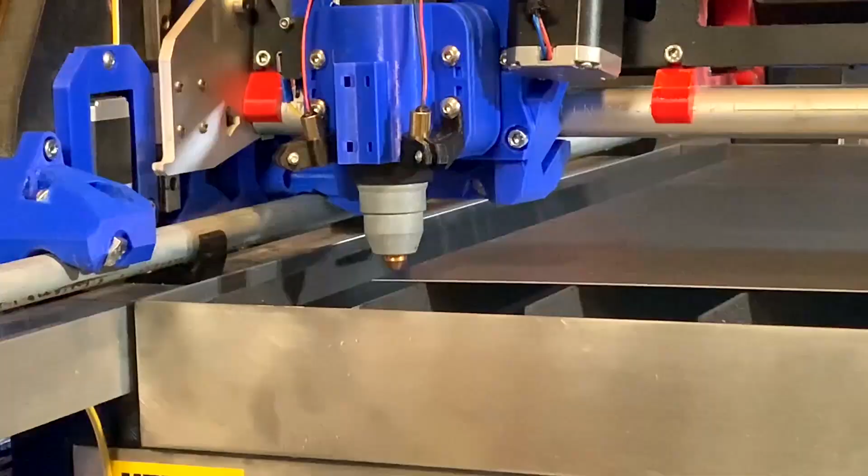In a world where some ordinary guy can DIY his own CNC plasma rig, using free plans for a mostly printed CNC from Ryan at V1 Engineering, and some free open source operating system and control software from Linux CNC, what's left to do but add laser crosshairs for targeting cuts, and then make cool stuff just because you can.

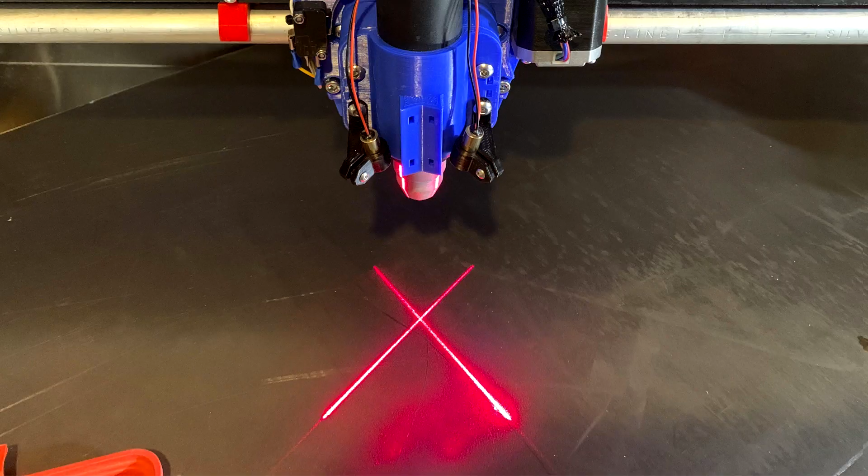Seriously, today we go from this cool DIY plasma rig, but without the lasers, to this. And along the way, I'll show you the entire design process from start to finish using a free version of the SketchUp 3D modeling software to go from concept to ready-to-print files. Ready, set, make.

Hi, this is Doug with Design 8 Studio, and I'm looking to put some little red sightline lasers on my new plasma machine. So I bought a pack of 4 of these, and when you go to shop for them, be careful to make sure you get the kind that don't shoot a straight dot of laser, but rather have a special distribution lens that sends out a line of laser light.

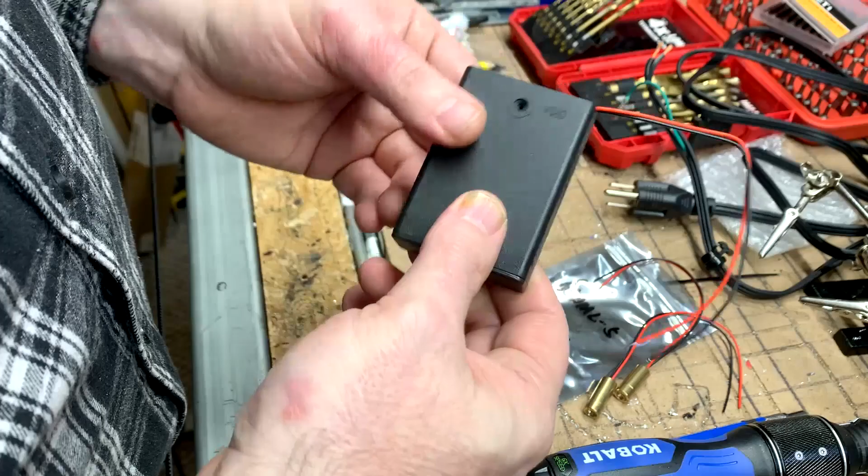So I got 4 of these, and I got a 4-pack of these little battery packs. They're made to hold AA batteries. One AA battery is 1.5 volts, and if you put 3 of them in series, then you get 3 times 1.5 volts, or 4.5 volts. I want to power 2 of them with a single battery pack for my plasma. So just a quick bit of soldering, 2 wires in, 1 wire out.

I'll be able to position them so that I get a crosshair where the plasma cutter is going to come down. And so I've just got to heat shrink this little bit onto that set there. That's going to work really good.

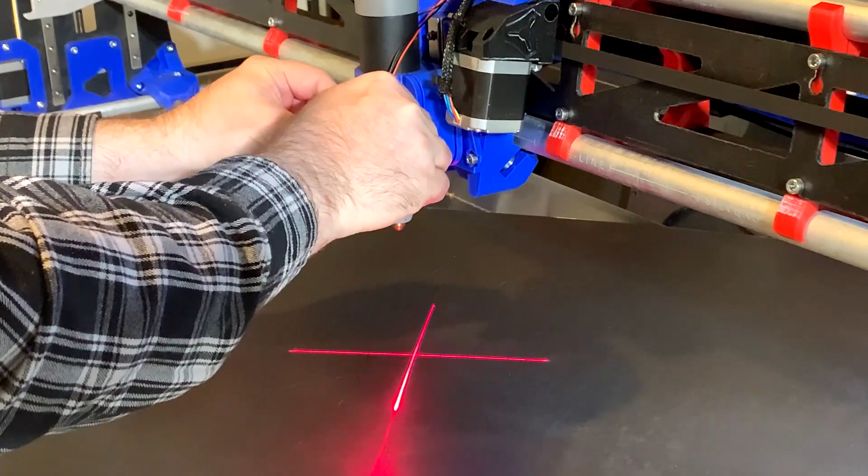I'm probably just going to use either double stick tape or Velcro to put this on top of the core or on top of the drag chain mount on my LowRider, and 3D print a little holder that can attach these to my magnetic breakaway. Okay, now it's just a matter of getting these mounted and aimed properly, and we'll have a nice sightline system.

So I had started working on this in SketchUp, and I'm using the free version of SketchUp. And just a few steps into it, I thought, well, why not turn the screen capture on and at least record what I'm doing? So I stepped through the undo stack to get back to this point. I'm just going to step back through the steps that I've done and talk you through it.

First, I have a set of precision lines stored inside one of these groupings for the dead center of the plasma torch. You can see it at the top right there, kind of an asterisk looking thing. I dropped a guideline going out in 90-degree opposition, right angles to each other, and then backed out of that. Once I'm outside this grouped geometry, I can draw lines without it sticking to or messing with this geometry.

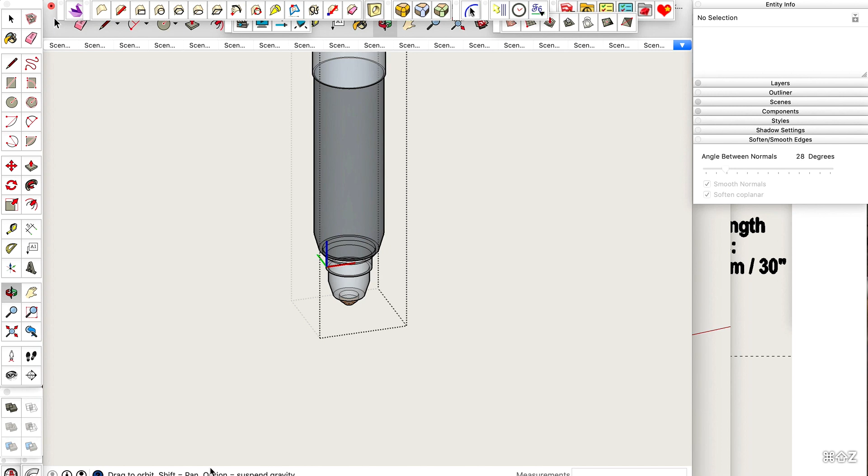The first thing I did was on the bottom of the torch, I added a 1.5 millimeter line that sticks out the bottom of the plasma torch that communicates where the top of the metal would be when I'm cutting. But that's not really what I want the lasers to point at, because this whole thing will be up by about 2.6 inches when I am sightlining in with the laser.

So I really want a line that goes down 2.6 inches to where the surface of the metal will be when I'm up high and moving around for placement. So I drew that 2.6 inch line, it comes to here, and this gives me where I want to sight things in.

Next in the stack, I drew a 50 millimeter line on this guideline and a 50 millimeter line on this guideline, and then I move those down to about where I want the top of the laser modules to be, and start connecting those to get some pointers in the direction of where I want the lasers to be focused.

And so I dropped a guideline along here, 36. You can see this little dot appear right here. That is a guideline that's dropped. I then did the same thing on the other side, causing that one to drop. Again, these are 36 millimeters from the tip of this 50 millimeter line. And then I made connecting lines from those points down toward my focus area.

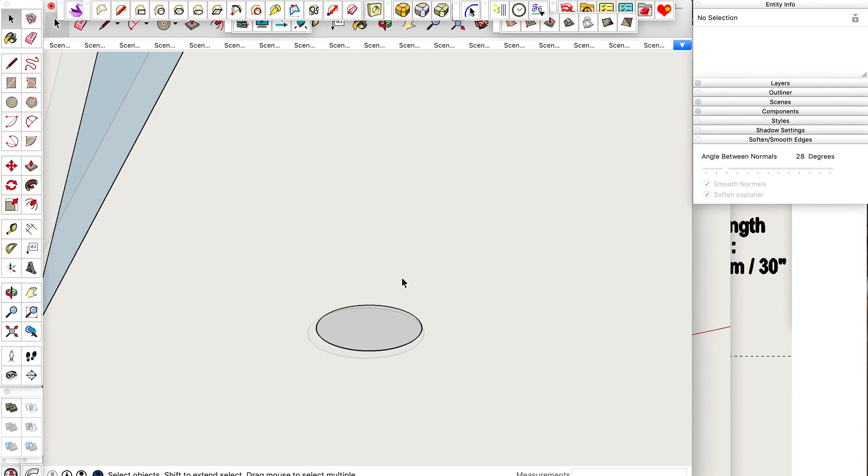So the next thing to do is to mock up the laser module itself. And the laser module, for just really simple configuration, it is about 9 millimeters. I think it was 8.95 that I measured. And so I'm going to use a circle set to 48 sides. I'm going to be good with that. And then it was 22 millimeters tall.

So I'm going to use the push-pull tool. I'm going to go up, type 22 and hit enter. And so there's my laser module. So triple click on it, selects everything. I'll right click and make component, and we'll call it laser red sightline. I don't know what the technical name for it is. That's going to be fine.

Now if I move around underneath, it's going to be pretty important to be able to hit the dead center of that. So I'm going to drop that little thing there. I can go ahead and put the other wings on it. And then up top we want to do the same thing.

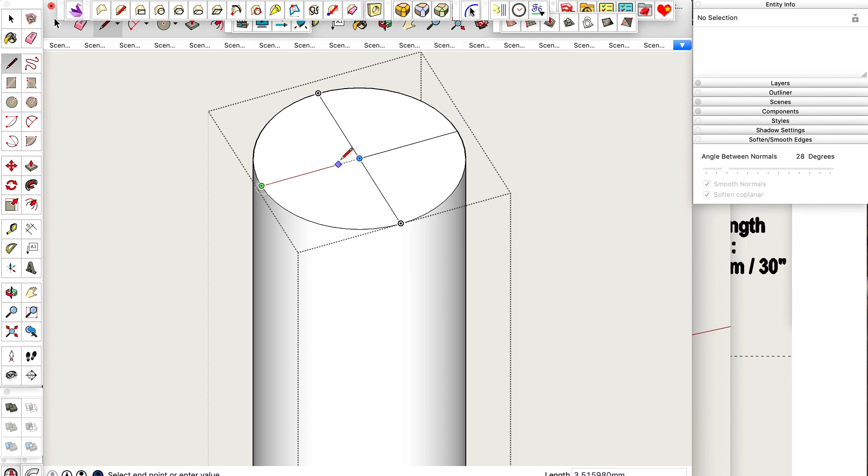And on my Mac, I'm going to do Control Shift Command G to exit that component. And if I do Command 2 and then Shift Z to zoom to extents, I'm now looking up at the bottom of my floating Z mount, the bottom of my torch holder and the bottom of this laser piece. So I'm going to press the M key to move, and I'm going to move this over and put it right on this point, and O for orbit, and I'm going to orbit around.

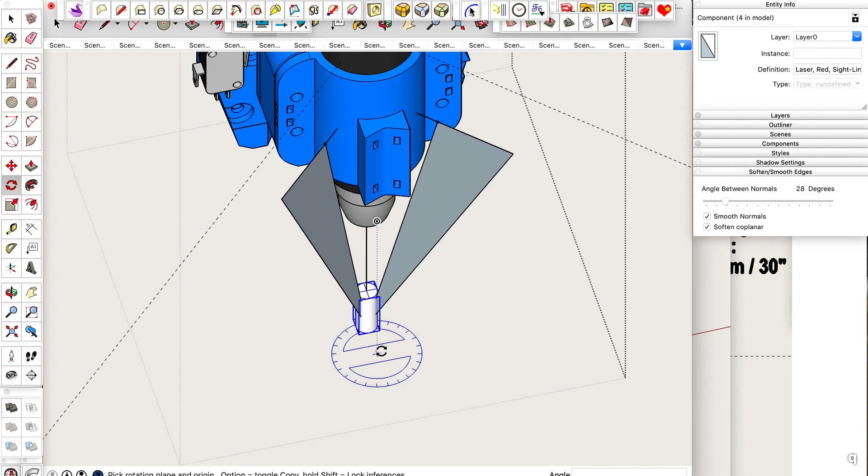And one thing I really appreciate about SketchUp is the ease with which you can get just the precision that you want on rotating objects. If you want to rotate something in a way that is normal to a certain axis, you get the blue when it's normal to that axis, and then if I rotate back this way, as soon as I get below the horizon line, the background changes to blue. And if I hit the rotate tool now and just hold it off anywhere in that area, then it gives me green to indicate I'm normal to that. And then if I spin around, I get red to let me know that I'm normal to that one.

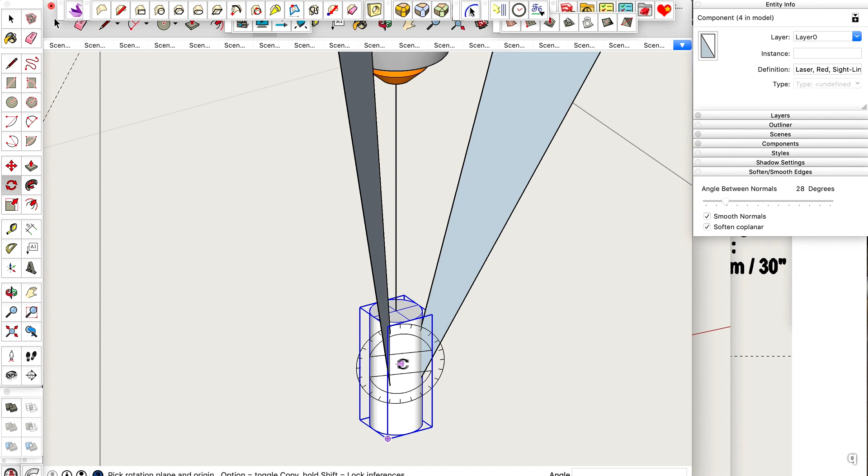But there's another neat feature, and that is that if you go to the rotate tool and you put the tool onto any surface, it will give you normal for that surface. In this case, it's not a surface on the laser module that I want. It's this surface right here. You may not have understood why I connected a triangle to make that plane, but this is one reason. You'll notice this is neither blue nor green nor red. It's none of the three main axes, X, Y, or Z.

I'm going to hit X-ray vision, which I've got a hotkey for. I've used custom hotkeys for so long, I'm not sure which hotkeys are native to the program and which ones are my custom add-ons, but for me it's Shift X for X-ray. And now I can see these lines right through the laser module.

But there's a really handy thing about the rotate tool. Right now, the laser module is what is highlighted, so it is what will be rotated. And when I position the center of this protractor-looking tool on something, that center point becomes the pivot point it will rotate around, and the plane that I have the tool oriented to becomes the plane in which the rotating happens.

So whenever you get on a plane that you want, you can hold Shift and it locks in that plane on that item. And then I can move down to the center point of the bottom of the laser module, tap with the mouse, and then move up to the top of the laser module. And when I begin to rotate, I'm rotating not just around that bottom center point of the laser module, but consistent with the axis that I selected. And when I choose any point and then tap with the mouse again, it will lock that rotation in as having happened around that particular axis.

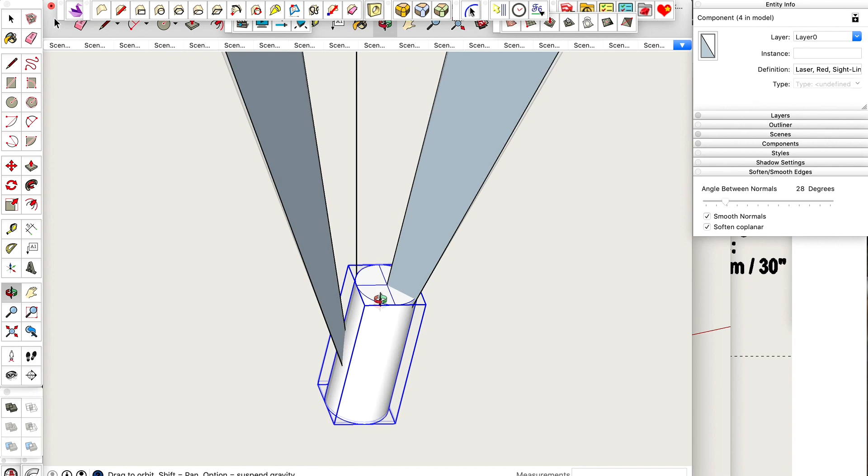And so you'll see here the bottom is still right smack on point, and now the top is on point. Now it may be that where I really want to be is not on this line, but maybe on another angle out along this line somewhere, maybe here or here. So I can always go back and redo this.

But what I'm going to do now is I'm going to copy this in this orientation, Command C. I'm going to hit Command Z to undo, and then I'm going to hit Control Shift V to paste in place. And now I've got the original one to work with, plus the rotated one. So for now, I'm going to create a layer called InProc for In Process. And this is a layer that I'm going to be able to turn on or off as needed. I'm going to hide it for now.

And I'm going to highlight this again, shift around, repeat what I just did a moment ago. But this time, I'll be rotating it to this one. So again, rotate tool, which for me is a hotkey Q. And I don't remember if that's native to SketchUp or if it's my own custom one. But for me, hotkey Q is for rotate. I guess think of the fact that the Q is round and it has a little hatch mark on it that looks kind of like a protractor angle mark. That's the only way I can remember it.

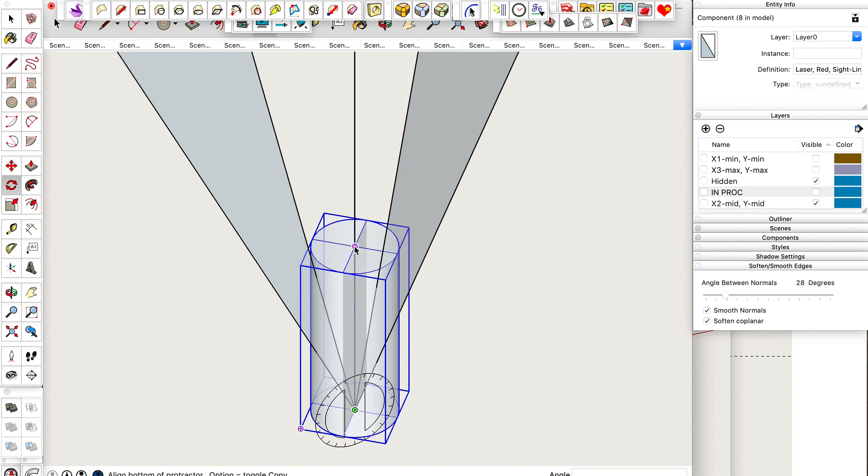So again, I'm going to hold shift to lock in the axis that I'm using to rotate. And now I'm going to position the center of the rotation tool on that endpoint, tap with the mouse, come up to this point, tap with the mouse, and now I'm beginning to rotate along that axis. And I'm going to scroll out, scroll back in. I'm using my trackpad to do that. And I'm going to tap on this point. And at that 3 clicks, I've now positioned this laser module in the plane that it needs to be.

And I can now take this one out of the InProc layer, put it back on layer 0. I'm going to copy this one and Command Z to undo and paste it in and just repeat the InProc thing that I did a minute ago. And now I've got this one unrotated. I'm going to keep it and store in case I want to go back and redo my rotations from scratch again. I'm going to make this one in the hidden InProc layer, in-process layer. Turn that back off. So now I've got 2 laser modules, and they're not placed at the right elevation, but they are placed at the right orientation.

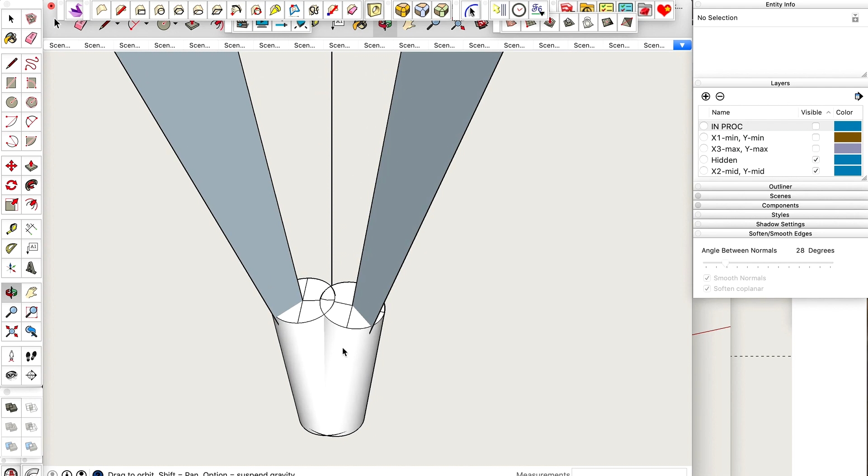And it's a handy thing about SketchUp. When you go to move something, if you're moving it along a line, it's really good at magnetically sticking to that line. And if for some reason you're having difficulty, if you go to hotkey T for the tape measure and put a guideline along the line that you want to follow, that kind of really double ensures that you'll be able to follow that. But if I grab this and move now, as I position, you'll see that line lights up in pink. And if I hold shift while that is lit up, it constrains it to that line. And so I've now moved it up.

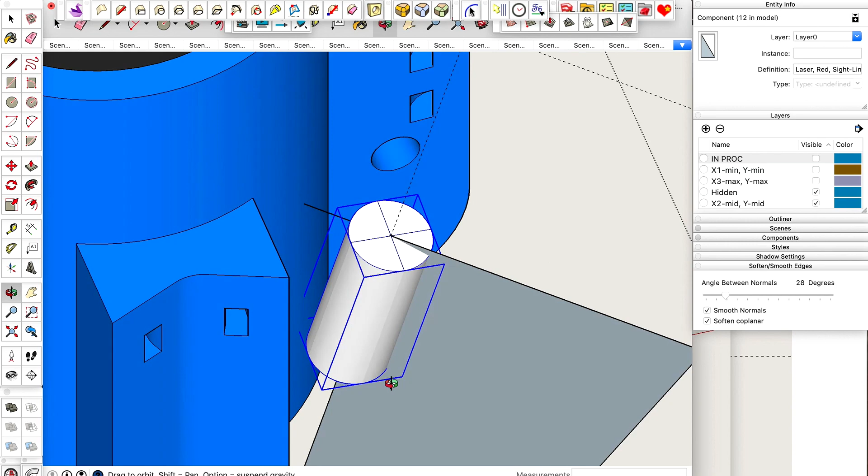And as we look in here, we see that while there is room for the laser, there may not be room for the plastic that's going to go around it to hold it. But if we're holding it around the bottom, it's pretty tight up against the mount. So I may have to strike another line further out and mount it on that other line further out. I think we'll do that. So I'm going to Command Z to undo that, and Shift X for X-ray. And I'm going to strike another line.

This time I'm going to put a guideline from here, and I'm going to go out, let's say 5 millimeters. So I just clicked here, moved over, typed a 5, and then hit enter. It gave me another guideline mark point. The guidelines in SketchUp kind of correspond to construction lines in Fusion 360. But guidelines can either be infinite that go off in either direction without end, or they can have a start and end point like the one that I just did. And when you constrain a guideline to have a certain length, it puts this little plus sign at the end of it. So I'm going to repeat that over on the other side.

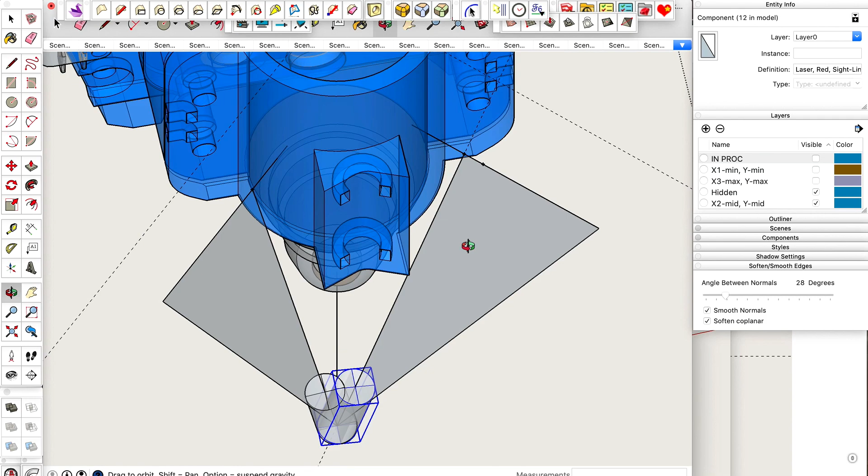O key for orbit, T for tape measure, click, type a 5, hit enter. Now I've got another one of those little marks there. And now I'm going to L for line, tap, go down to this center point here, snap onto it, tap again, and O for orbit, L for line, click, go down to the center point, click. So now I've got a new set of lines to work from.

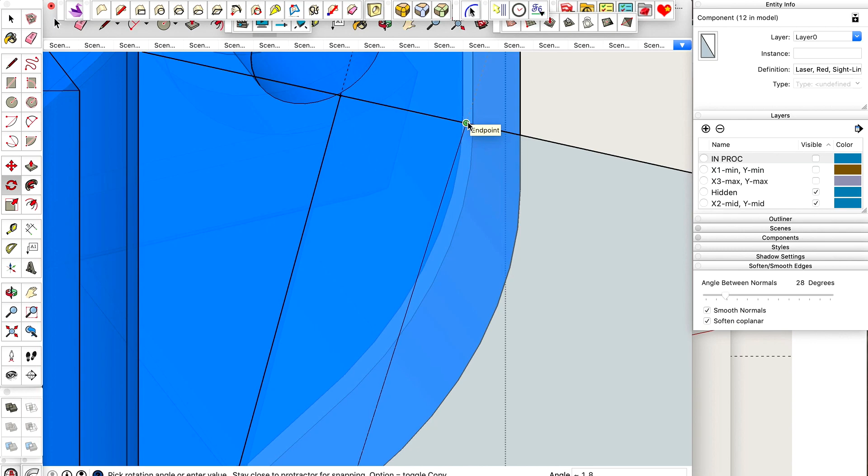Same thing again, I've got this laser module highlighted. I'll hit Q for rotate. I'll get on this plane. I'll hold shift to lock that plane in. I'll come down to this center point, tap to lock that center point in. Then I'll come up to this point, tap to say that's where I want to start the handle for the rotation. Come up to here and lock onto this one and say that's where I want to swing the rotation around. That is approximately 1.8 degrees. Tap again. And so before, after, undo, redo.

And now I will tap on this one and do the same thing. This one's highlighted now. Q for rotate. Shift to lock that in. Set the point right there. Tap. Come up here. Tap. And come up here and tap. And now I've constrained the movement for another set of reorienting steps on these two laser modules.

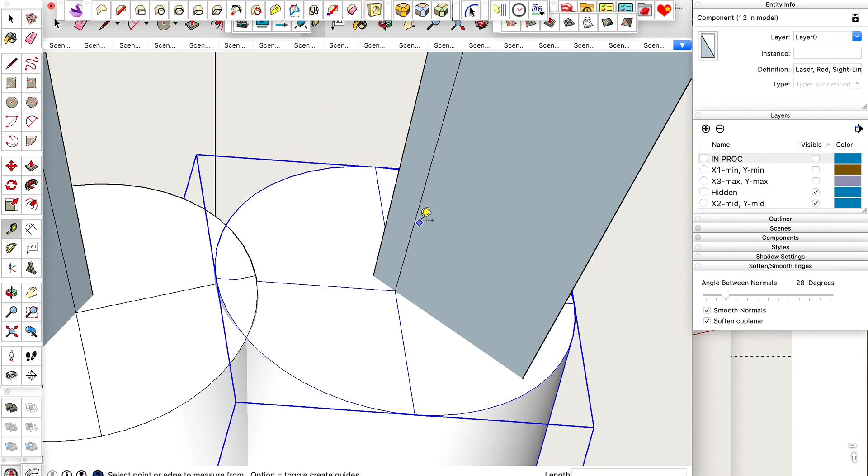So now I'm going to grab this one. I'll put a guideline here just in case again. I don't know if that's necessary or just kind of habit of mine. It lit up that line, so while it's lit up that line, I'm going to hold shift to constrain it to that, and I'm going to go to that point and let go. So I'm positioning these laser pointers out in space, but they're a little too high, right? Because I don't want this plastic edge to block the bottom of it.

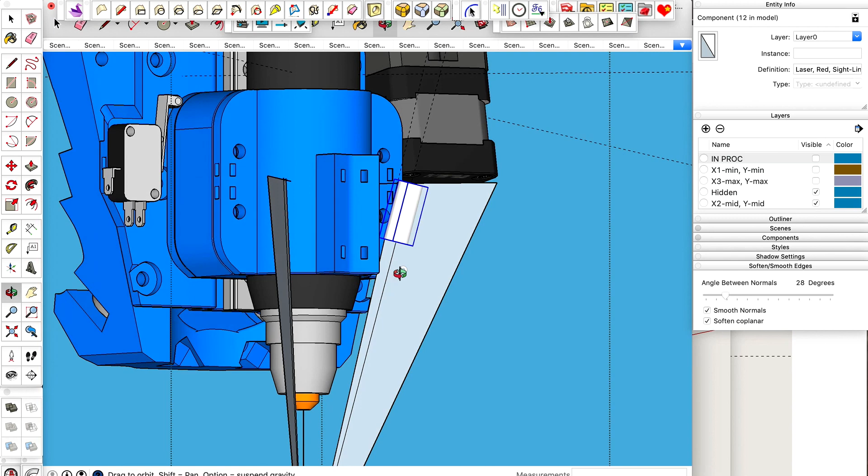So I'm going to use Command 3, which gives me a front view, and then Shift Z to zoom to extents. And I'm going to find out how far down I have to go. I've got to go from about there. I'm using T for tape measure there, down to, okay, so that's 13 and a half millimeters down. I like that. So just to give the maximum visibility of the laser, I'm going to move this down about, let's say, 14 millimeters. Command 3 for front view, Shift Z for zoom extents.

And now we've got the laser diode lens down below the lip of this torch holder. And as you can see, when I go to this view, there's not going to be anything blocking line of sight here. Not only for the point that it needs to, but some more of the crosshair going on toward the back of the machine. And again, if I do tape measure, click and click, it shows in the lower right corner 14 millimeters. That was 14 millimeters down.

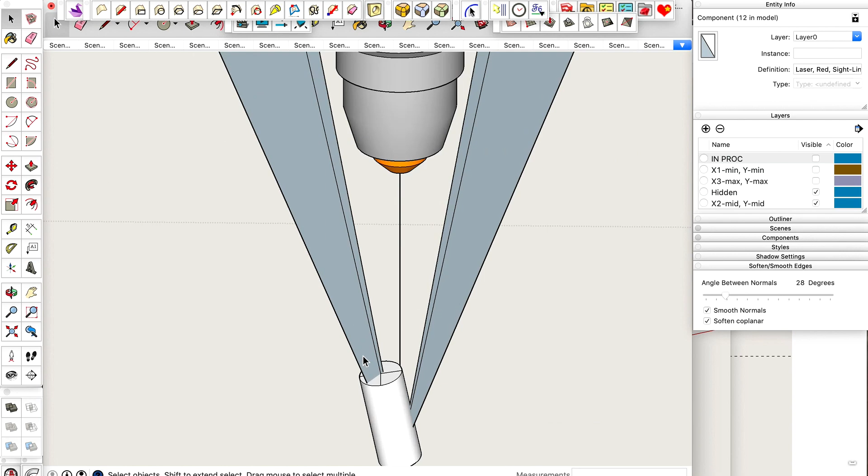So now I'm going to get this one. I'll go ahead again, drop a guideline just in case it helps. I don't know if that's just habit. I'm going to move this up this line. All right, and now I'm going to move it down by 14 millimeters. I'm going to type 14 and hit enter. And again, Command 3 for front view and Shift Z for zoom extents. And that's looking pretty good.

So typically in 3D printing, if you want a really tight fit, you could go for 0.125 of a millimeter off of the item that you're trying to fit to. A comfortable fit would be going 0.25 millimeters off of the item you're trying to fit to. It's common if you get any bit of elephant's foot or even a tiny bit of over extrusion, you can wind up with an opening too small to fit the thing that you're trying to fit.

And so I'm thinking in terms of taking advantage of the flexibility of the plastic to deliberately make the opening a snug fit, but leave a gap where a screw would tighten it so that it could be pushed into and then snugged and tightened down.

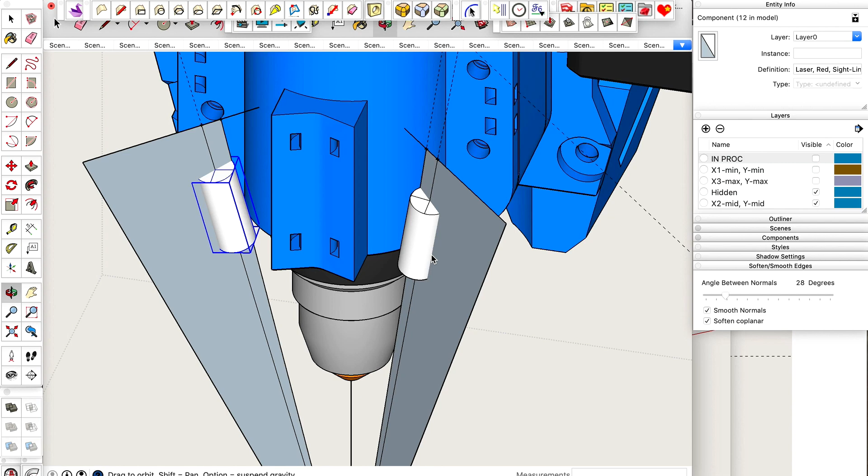So I'm going to Command C to copy this and Control Shift V to paste in place. Right click on the new copy, which is now on top of the old copy, and make it unique. And we're going to change it to laser holder. And for now we'll call it right, because the other one can match its appearance exactly, but it will need to be mirrored.

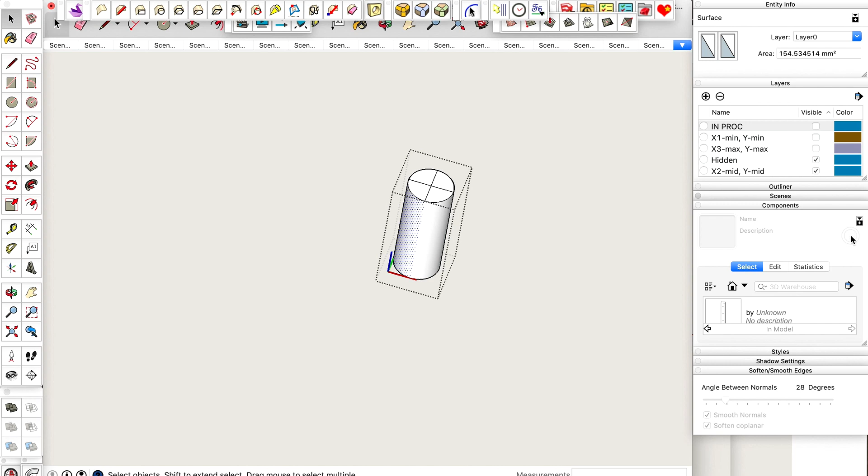So if I take this and Command X to cut it, you'll see that I still have the laser there, and Shift Command V to paste in place the laser holder. So if I double click right now, the question is, which one am I in? If I go to components within the model, there's something weird going on here. It's like every click is a right click. I don't know what's going on there.

So I'm going to temporarily move this one over in the red direction by 50 millimeters, remembering what I've done, and I'll see that that's the laser module. So I know that this one is the laser holder. The laser holder is going to become a negative or female, where this was a positive or male a minute ago. So when I double click on this, I can now delete these lines,

and I'm going to go for 0.125. So I'm hitting F for offset. Again, that may be a native hotkey or my own custom hotkey. I don't remember. F for offset, and I'm going to type in 0.125. Hit enter. Oh, that's looking pretty tight. I don't think that's enough. F for offset, and I'm going to go 0.25. Okay, let's go 0.2. Okay, I'm okay with 0.2.

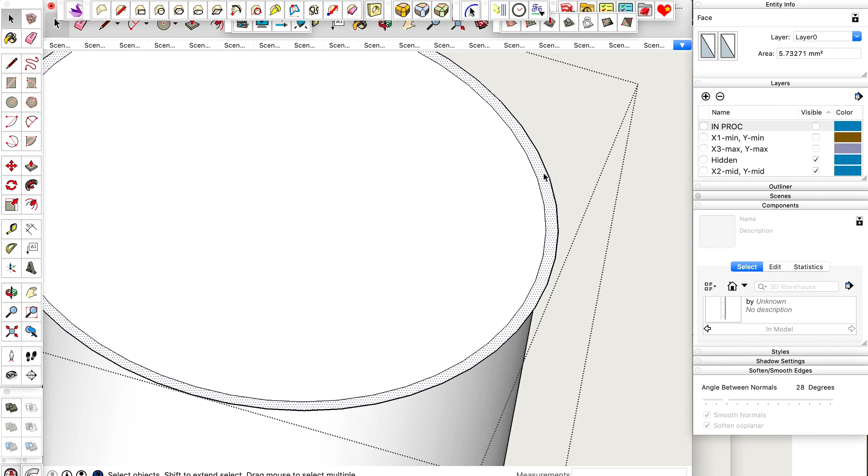So in this instance, I'm now going to click on this one, and now we're going to talk. This amount is going to be the gap between the laser module and the inside of the holder. But for now, I'm going to use this plane for another offset jump. I'm going to hit F for offset. Now we're going to talk about the thickness of the plastic. And I'm going to go with 2.4 millimeters.

Now I can delete this and delete this and this whole cylinder, everything here. I'm going to triple click on it and delete it. And now if I take P for push pull tool, go down, type 22 and hit enter, and Command Control Shift G to exit that group. Let me go ahead and paint this kind of a gold color, because the real thing kind of has a brassy or gold color to it. And I'm going to move it back now 50 millimeters, type 50 and hit enter.

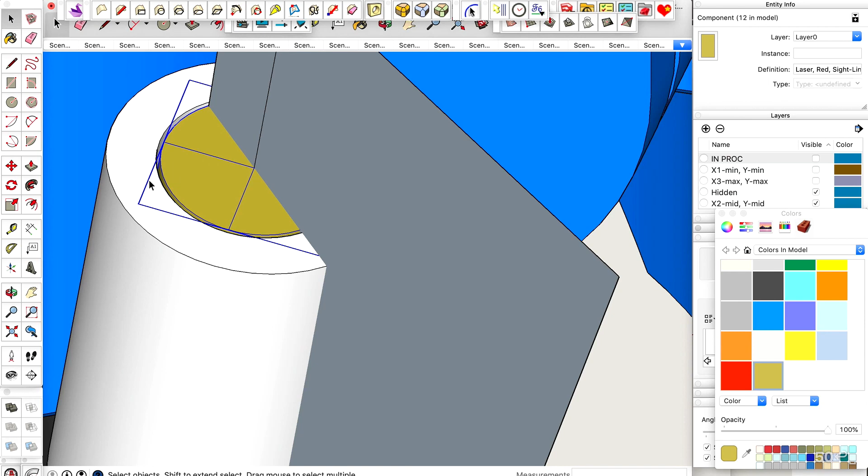So now we see that laser module inside the holder, but the holder is too tall. There's no part of the laser mount sticking out for turning it or rotating it. So I'm going to double click to enter into the editing of this component. P for push pull tool. I'm going to go down. So it was 22. So if we go 11, let's go 9. So if we go 9, this remaining thing is 13 millimeters tall. So then that's how much of the laser module would be sticking out of the top of it if the bottom of the laser module was exactly lined up with the bottom of the holder.

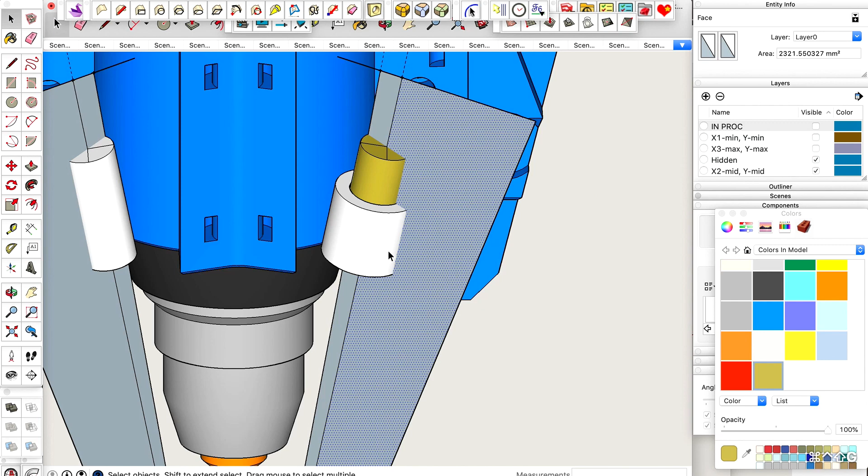Okay. Now we need to think in terms of the gap and a flange on either side of the gap with a place for a screw to go through and a place for a screw to grab onto. So I'm going to double click again. Matter of fact, let's take this plane right here, and I'm going to use L for line tool, and I'm going to go right here, right where it gives me that little indicator. I'm going to go to this indicator, then I'm going to grab that line, double click, and then Control Shift V to paste in place. So that's the plane right there.

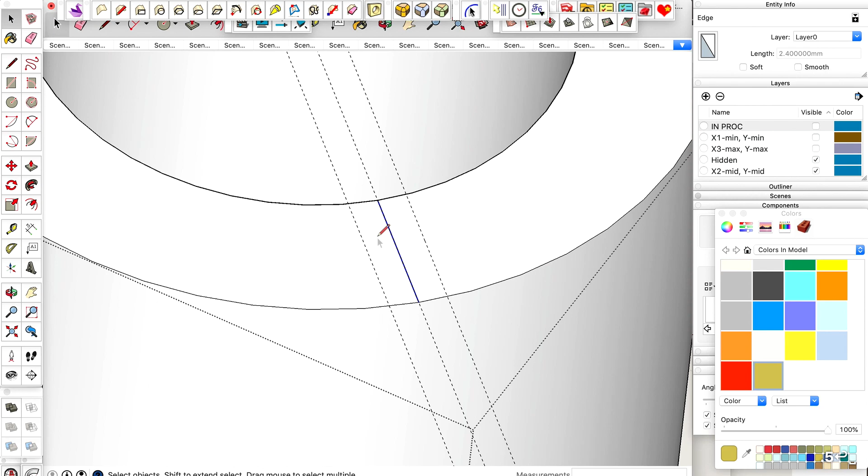So I need a pretty decent opening. So let's drag a guideline away from here. That was T for tape measure, hotkey T. Let's drag a line, let's say 0.75. That's a lot. Let's try 0.5, okay? And then the other way, 0.5. So if I grab that nearest circle side segment, it's 0.6, and that's not bad. I'm going to grab that one, and I'll go parallel this way. Let's put this guideline on that and put this guideline on that one.

E for eraser, erase this one. L for line tool. Let's put a line right here. Put a line right here. Delete this line. And now if I highlight this plane here, this face, push pull tool, push down till this point and let go. Then let's go ahead and delete this plane. Sometimes it deletes it for you automatically. Delete those lines in between. So now I've got my holder, and I just need my flange.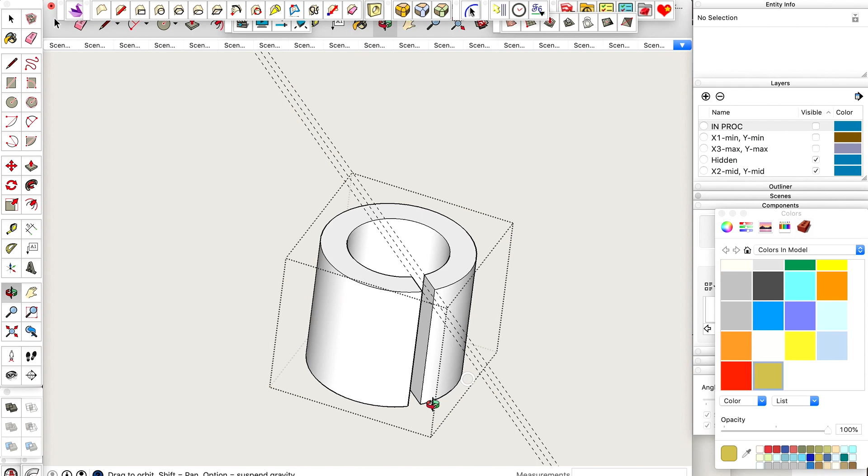So the flange on one side would be where the screw will sink into. The flange on the other side would have where the head of the screw is. And it's up to us whether we want to just make the hole tight, a little bit small so that the screw threads bite into the plastic, versus some kind of over-engineering like a nut on the other side or a heated insert. And I think just some plastic for the screw to kind of cut its own threads into should be fine.

So by the way, I made this initially with 48 sides. The circle had 48 sides. There are hidden lines on the places where the sides meet, joining to the next side. And if I hit Control Shift X, which is I'm pretty sure a custom hotkey that I created, it turns hidden geometry on, and then Control Shift X turns it back off again.

So think in terms of, again, for that screw to have some room to bite into, we probably need at least like 4 or 5 millimeters. So I'm going to come here, come out, let's say 5 millimeters. And that's pretty close to this one. So let's go ahead and let it be that one. I'm going to snap it right onto that one.

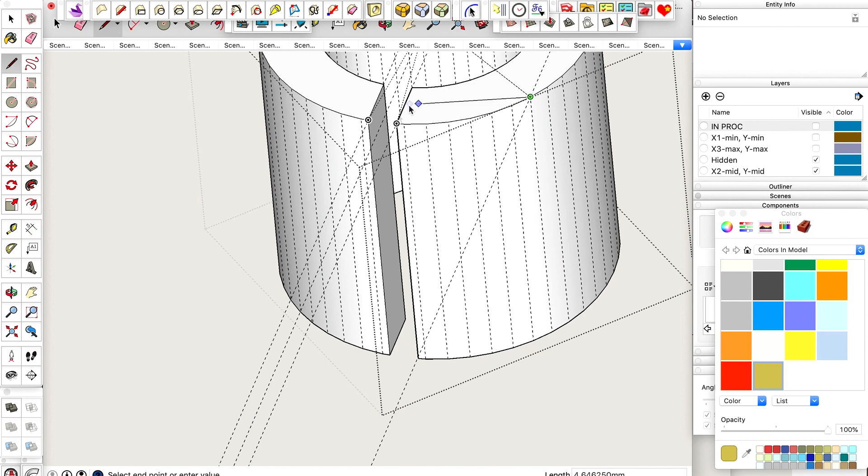So then if I get a line here, pull it out by, well, let's say the head of the screw is probably 8 millimeters. Probably need a couple of millimeters on either side of it. Probably need about 12. And that would be from this point here. So what if I put a guideline from here to here, and then bring that guideline out this way by 12? That's where we need to go to.

So I'm going to L for line, bring a line out to here, over to here, back to here, and I will push pull. P is the hotkey for the push pull tool. There, we've got that. Okay. Fancy. And this side, it doesn't have to be quite so thick. 2.4 millimeters. Let's go a little bit thicker than that to get out to this line right here.

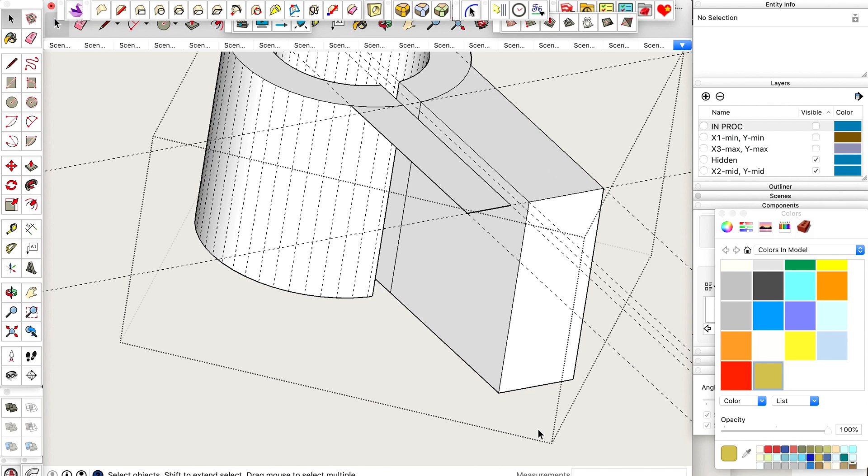E for erase. And again, we're going to go click, with the line tool, which is L hotkey. Click, click, click. Now the push-pull tool has memory. It remembers the last distance by which it extruded. So if I tap on P and then double click, it will automatically go to match this one.

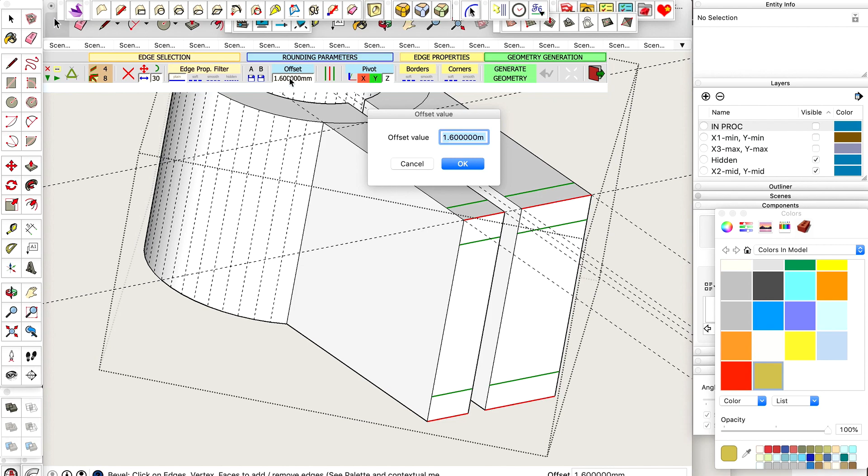And this distance from here to, say, about right here is 4.25. This distance, 13. So let's do this. I'm going to select this line, this line, this line, this line, and this line. Choose this tool and go 1.6 and generate the geometry, and it knocks those corners off like that.

These lines here can technically be erased, as well as that line there, that line there. They wouldn't hurt anything to leave them, but go ahead and erase that and that. So we're off to the races now. We've got a nice shape here. I'm going to delete the guidelines.

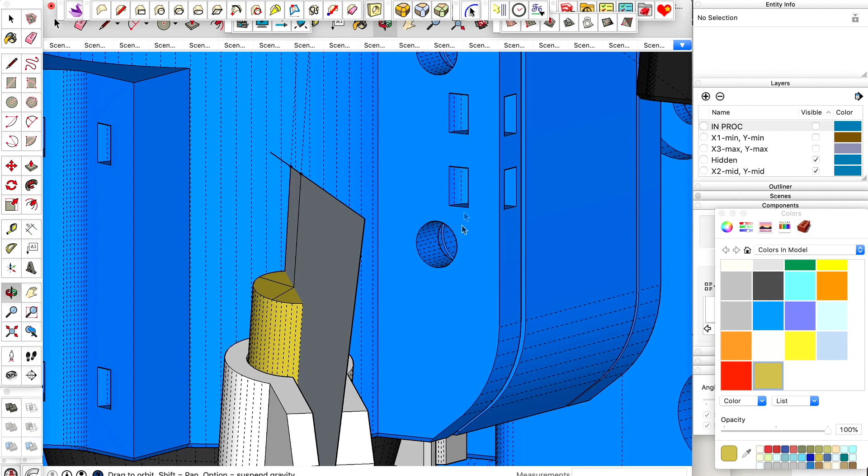Now we just need some way to mount that over to this operation here. One way to mount it would be to loosen this screw in this hole and then reinsert that screw, or a longer screw, through a piece of plastic that is attached to this. That's one way to do it. Another way to do it would be to run zip ties through here and through corresponding holes in a piece of plastic out here that comes over and is connected to this. So those are options.

Thinking, thinking, thinking. Okay, so thinking in terms of this screw head right here is really close to this. So trying to get up around here, and if I had it to do over again, I would have either put these two closer to each other so that there was more gap between them and the screws, or even just done one of them instead of two, so there would be more room around them.

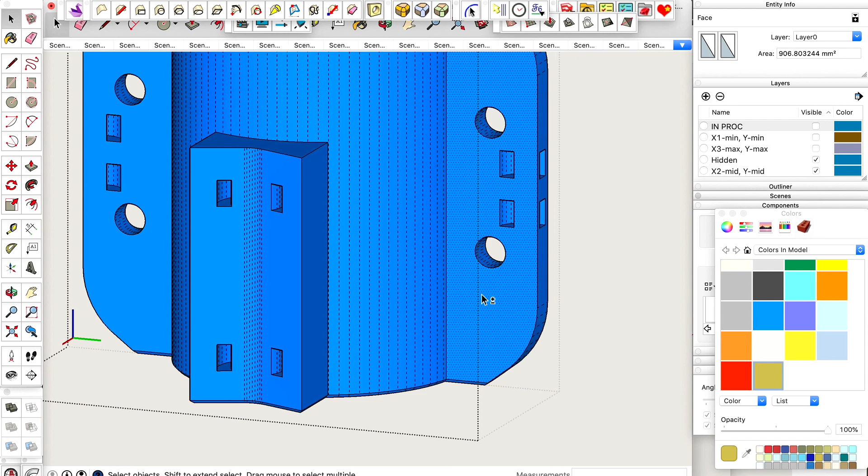So I'm thinking in terms of loosening the screw that's in here and putting it back through something. So I'm going to copy this plane right here, this face rather. Copy that. Command Control Shift G to exit that group. Exit again. And double click on this. And now Control Shift V, which is a custom hotkey to me, if I'm not mistaken.

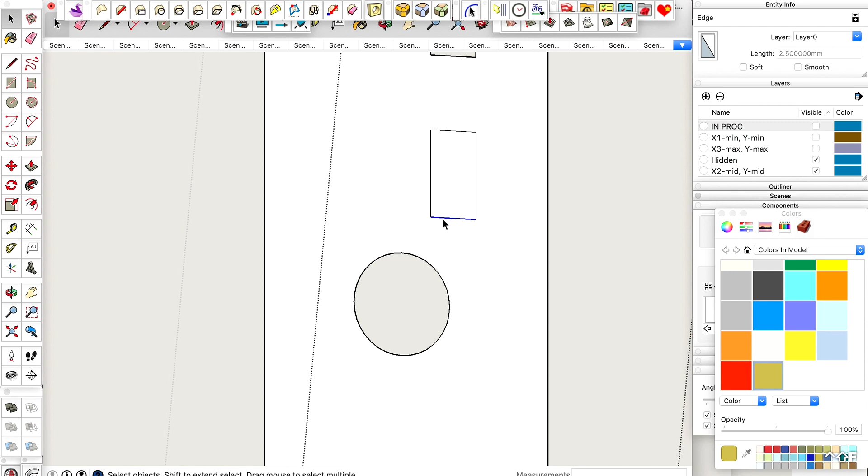I can delete this now, and I'm going to run a guideline over here, run a line down to here, run a line out to this point and up to that. Oh, that's not what I wanted to do. Right there. Put a line, L hotkey, from there to there. So I can delete this now, and I can delete all of this.

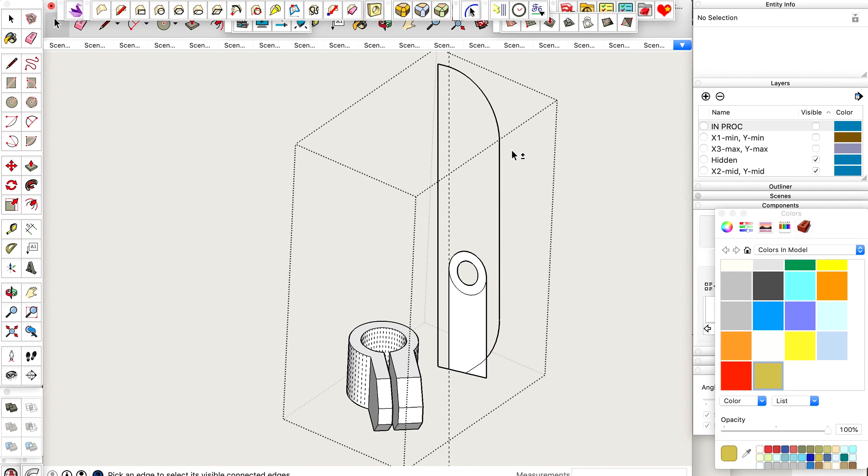And I'm going to select all of this curvature, as much of it as I can at one time, by using Tools, Select Curve, and it gets it all. I've assigned a custom hotkey to that for myself of Control-Shift-C, and again Control-Shift-C to select curve. So this, and again, so this can become our basis.

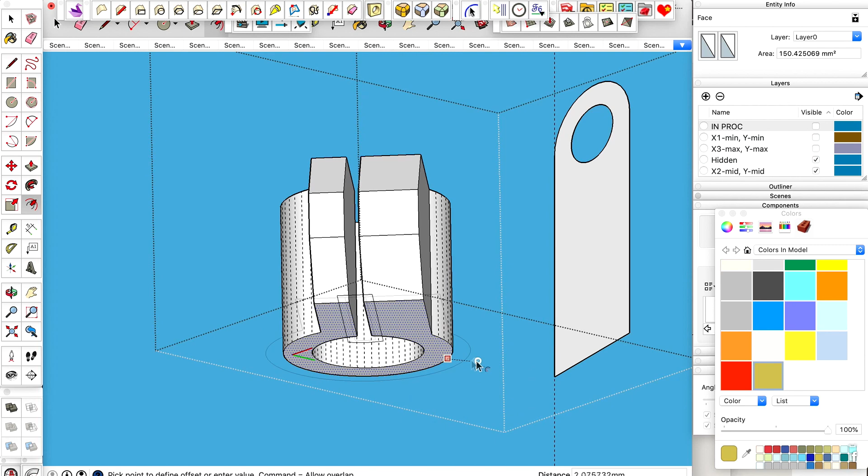I'm using P for push-pull and bringing it out. And we've designed something that, unless we do some work to change some of these face angles here, it's going to be pretty hard to get this to print. So let me undo that and think in terms of this plane here. If I do an F offset and I bring a really big offset here, I'm just doing that just to get a working plane.

If I come down, if I drop a guideline here, you'll see that there's an intersection point with this plane. And if I go from here, L key, hotkey, from here to here, and then on from there, L, from that X to there, I can delete this plane now, and I can delete this and this and this.

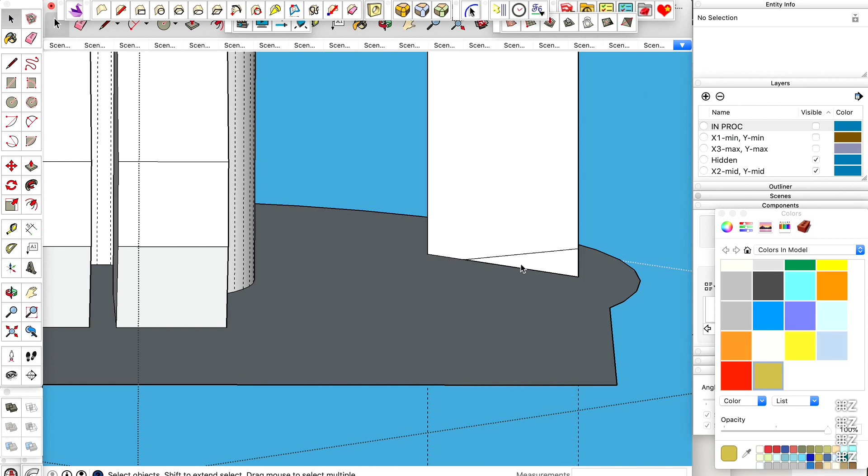What happens now when that comes up? It's still not right. Okay, so rather than delete that plane that I deleted a minute ago, I need to leave that. Just delete this. Shift X for X-ray vision, delete this and this.

What I really need to do is just go ahead and extend the bottom of this over, and then bring my shape out, and then use that plane as a cookie cutting tool to cut the bottom of it off. So if I bring this over now,

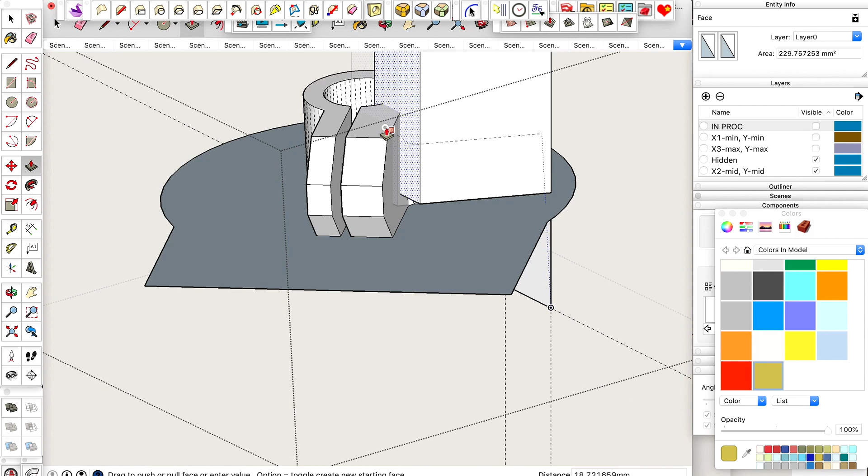and then this also, when I bring them over, you'll see that I can assign a non-normal new bottom to that that's congruent with this plane here, and it will allow this to be printed using this plane as the side that will go against the print bed.

So I'm going to click tap with the L hotkey for line tap, and again tap over to here, on over to here, same thing around the back side. E, erase. E is the hotkey for the erase tool. Oops.

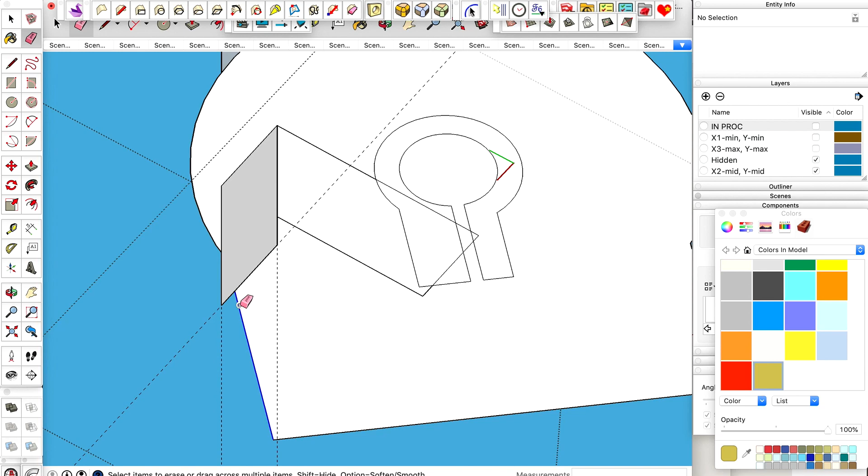I'm going to use the Eneroth Face Creator extension to try to get a recognizable plane that can survive. Why is it? I don't know why I don't have a plane here anymore. Okay, that's good.

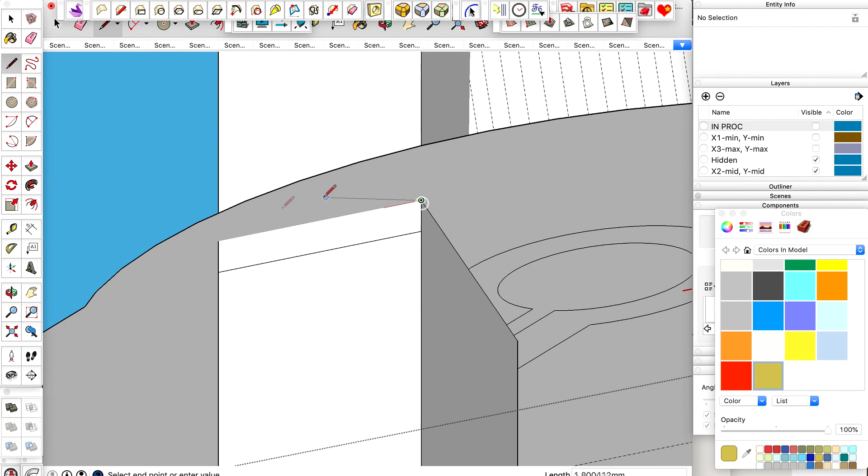Using the L hotkey for the line tool, and I'm trying to get a face for across here that will be a standalone face. And still struggling somewhat with that.

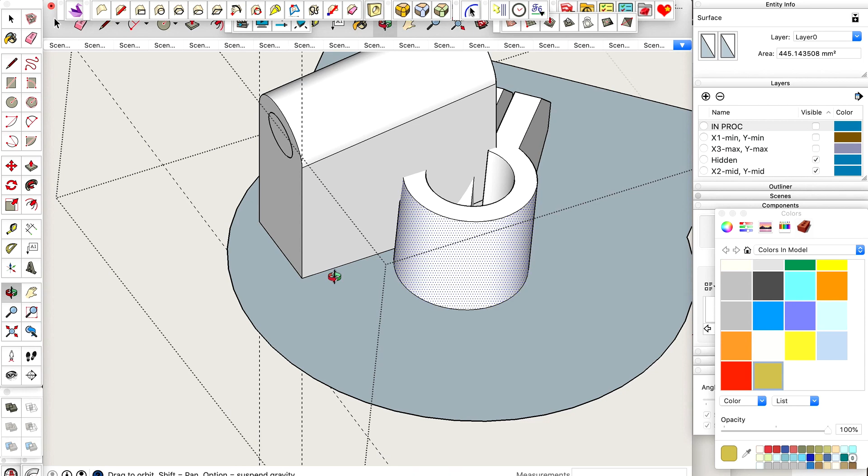Okay, so for right now, I'm going to hide the invisible lines. My hotkey for that is Shift X. No, Control Shift X. I'm going to select that cylinder and that side wall, and I'm going to ask it to generate geometry where those two meet.

Right, pointer tool, right click, intersect faces with selection, and you'll see that it drew those lines. And one of the little tiny segments was too small for SketchUp to want to mess with it. I'm going to put a guideline from here to there, and that guideline is going to serve.

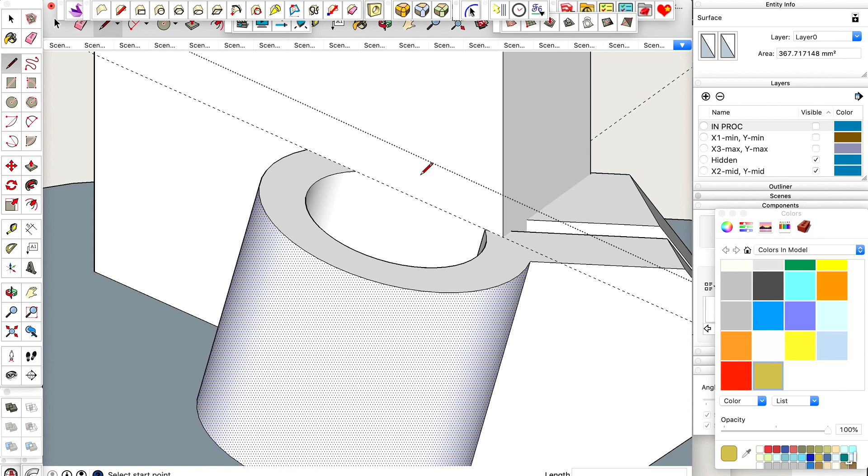I'm going to push pull this in by, I'm going to press Option and push in by 2.4, and now I'm going to come from there over to here, and the idea here is that this part is going to be gone. This part is going to go up to get to the screw hole, and this part is going to be printable to keep everything tied into this part.

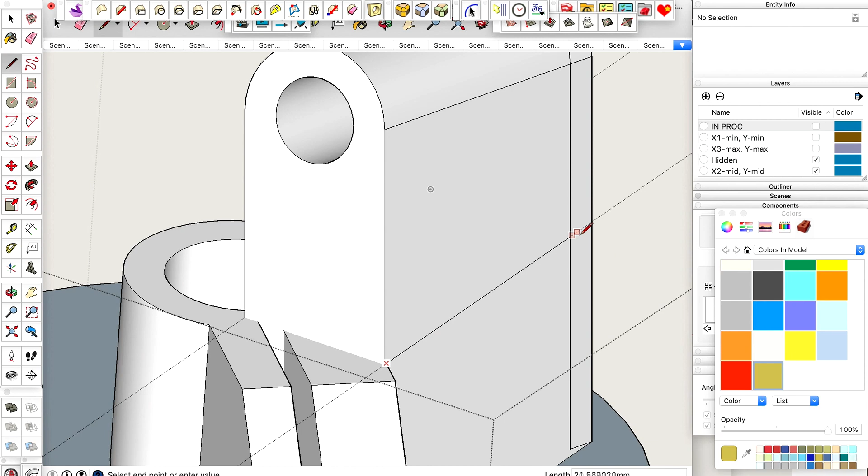I'm going to take that same line and bring it this way over to this point. Same thing. I'm going to grab from here over to here. And it found an issue. From here to here. Okay.

Let's reverse this face because it's got its inside facing out. And this line is now not viewed as intersecting this plane. So there's a trick I found that works. I click on this line and I do Extensions, Face Creator, which for me, my hotkey for that is Control Shift F. And when I tap that, it makes it where I can select these two independently.

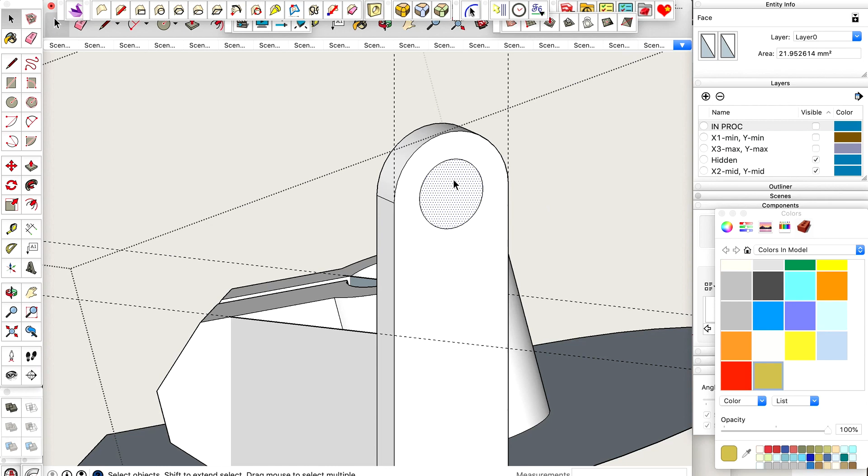And I want to push pull and extrude that through to there. So there is my wing for my ring, wing, whatever you want to call it, for the screw. Oops.

Okay, so I need to remove that. I cut this plane. Let me back up. I selected this plane and I went Command X to cut it so that I could get in to select this to delete it, and now Control Shift V to paste in place. So that's properly hollow now. X-ray vision, Shift X, I see some stuff that needs deleted.

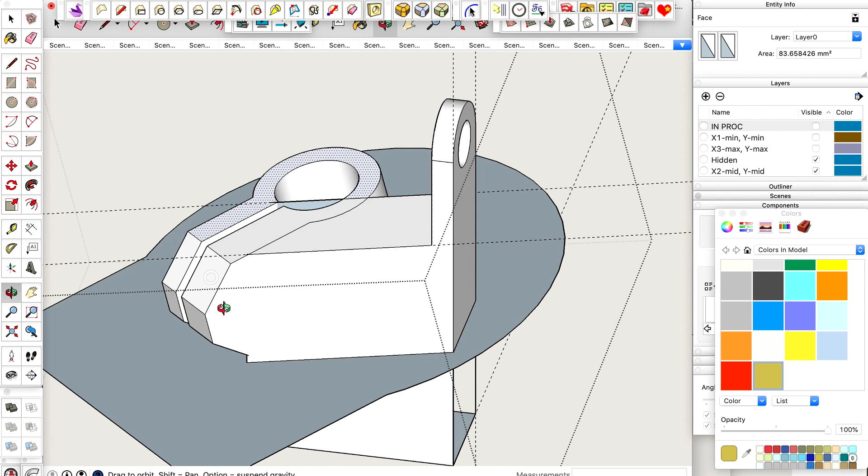Now in an ideal world, this plane and this plane and this plane, they're all the same. And I can see I need an intersect with this and this. Right click, intersect with selection, get that.

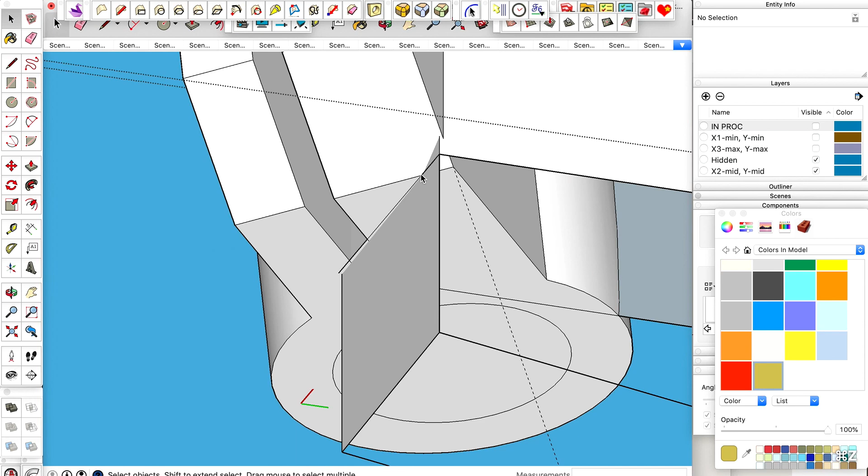Not sure why this line is so far off from where I imagined it to be and wanted it to be, so I'm going to redo this line. Definitely something kooky with it. Focus there, tap with the L hotkey for line. Focus here, tap. Okay, let me delete these lines now. Delete these lines.

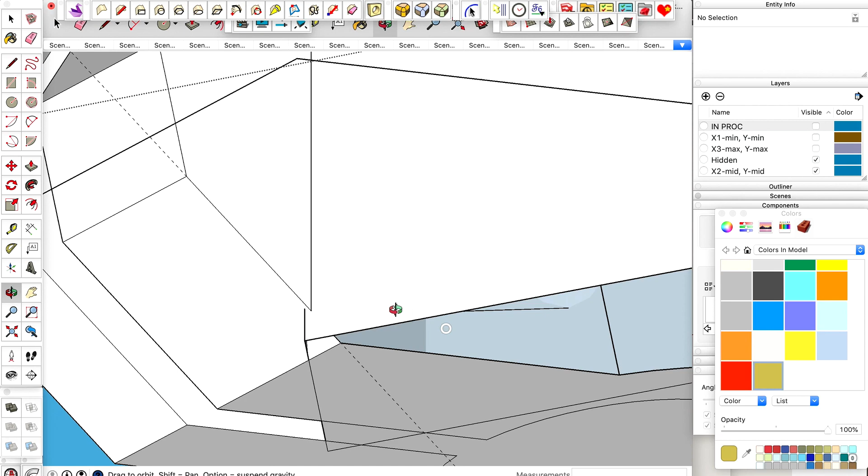Okay, I may have to bodge this by just putting some spider webbing lines to connect to create a face where I need a face. I need a face across here. I don't need that face. Don't need that face. And we can take this over to here. And then take this up to here. Get rid of that, and that, and that. Okay, it's starting to look a little bit more like what I envisioned it looking like.

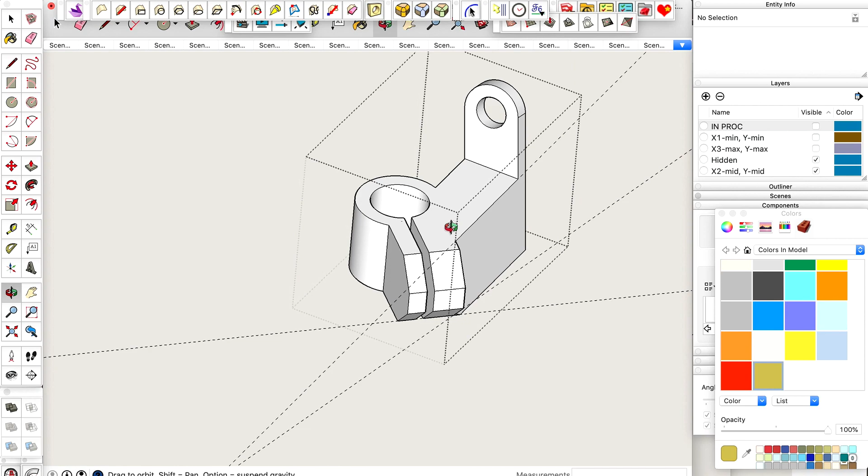Shift Control C to select all of that. This can go, this can go, this can go. And ideally when I delete this, these two faces will merge and remain. Good. Same thing on the bottom. I should be able to delete this, and the two faces should remain and merge. Very good. Technically, I think this plane and this plane are the same. Yep, so I can delete that line. Delete guides. Okay.

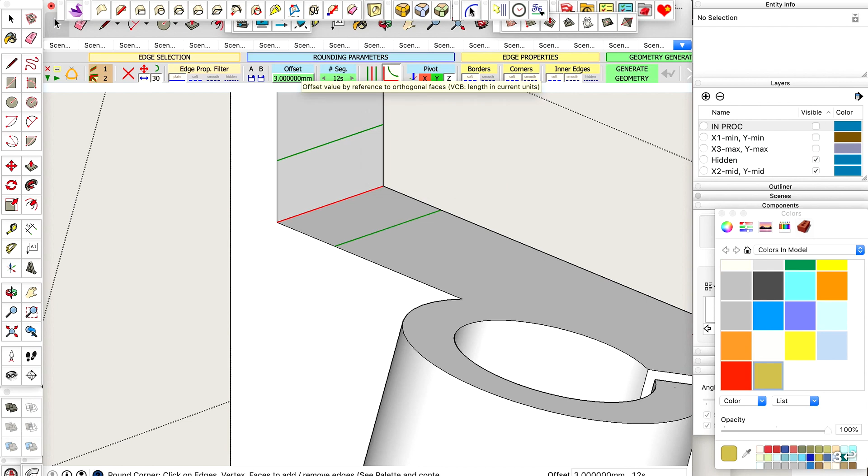So a couple of other tricks up our sleeve. One is that we can put some strength here. Let's say 3 millimeters. Give a little bit of strength there. And so the next question is, is this part a watertight solid? I see some lines here that shouldn't be here. Keep spinning, I see more. Keep looking around, I see more.

All right, so I'm going to turn on show hidden geometry, show invisible geometry, Control Shift X, and I'm going to turn on X-ray vision, Shift X, and I'm going to use Tools, Solid Inspector, and let it check out this solid. No errors, everything is shiny. I feel happy. I still have to do my screw hole though.

Alright, if I remember right, this was 12. Looks like we wound up with 13. Okay, 12.9. So let's go 6 in. And then down here is 13. So let's go 6.5 down. So this is just slightly out to the right as opposed to dead center, but that's okay because it's getting us a little bit of room away from this part here.

And I'm thinking M3. So 1.625 gives us a circle that is 3.25. So that's 3 millimeters plus 0.125 of a millimeter clearance, allow for overprinting. And experience tells me that that will be okay.

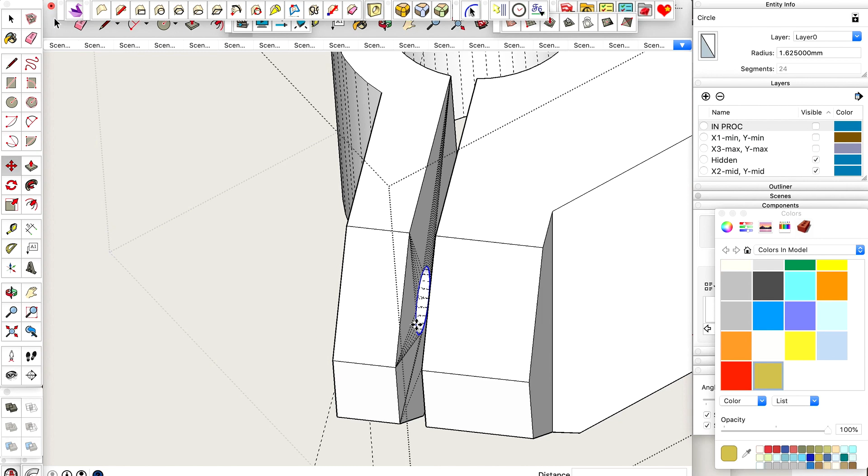So I'm going to push-pull tool, P, lock onto that point right there. And that should get us through. Oh, I locked onto the wrong point. Okay. P for push-pull tool, lock onto this point. There we go. And then I can grab this and move tool, but I'm going to press Option so that it moves a copy.

And I'm going to move that, and I'm realizing now that I need room. No, I don't need room on this side, because this is where the screw is just trying to bite into. I need to put that circle on this wall and then head through. So I'm going to move that this way. To here. And I've got 5 millimeters to play with.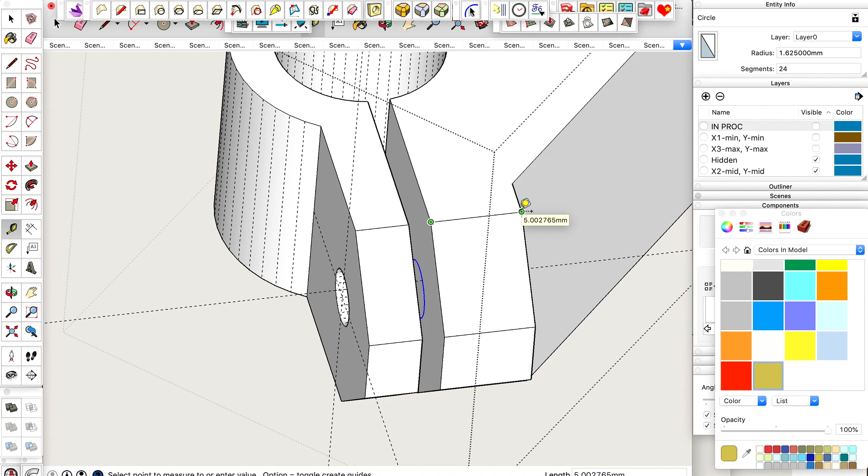What happens if I push this through beyond 5 millimeters? Just take it all the way on out and then hide the hidden geometry. Select, right click and intersect with selection to draw some lines here. I should be able to now delete this and this and this and this, remove this line, and there we go.

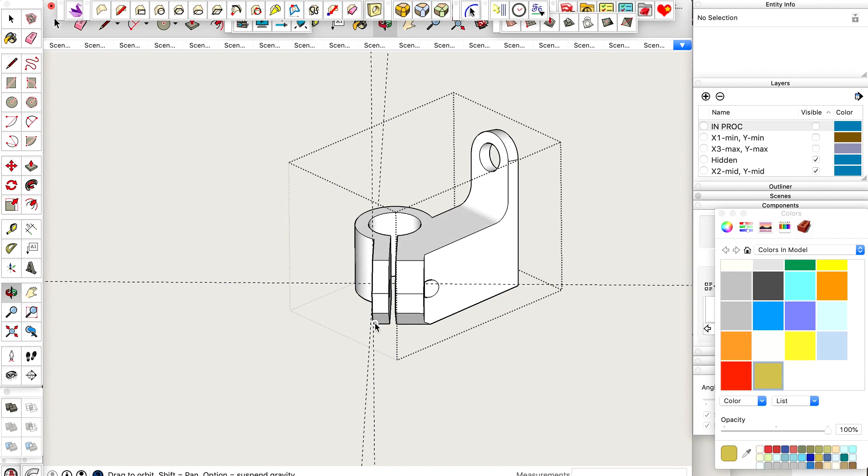So this isn't totally in the print orientation yet, but it can be moved into a print orientation. It's in the real world orientation that it needs to be to get that laser module pointed where we want it to be pointed. So at this point, I'm going to take that part and the laser module and this, and M for move tool and Option to make a copy.

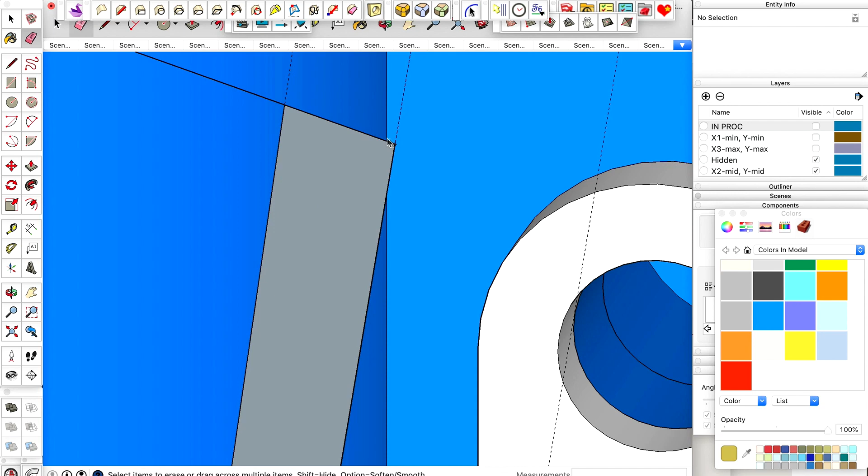I'm going to move it along the red X axis over here, flip it along the red direction, move it over to here. I'll cut it for a moment so that I can delete that. I'll repaste it again, and I can now get rid of that triangle, these lines, these, and these.

Okay, kind of looks like fangs on a Star Wars creature sticking off this weird robot face, but I'm okay with that. So you have just witnessed from scratch the modeling of an add-on for my LowRider 3 based plasma cutter.

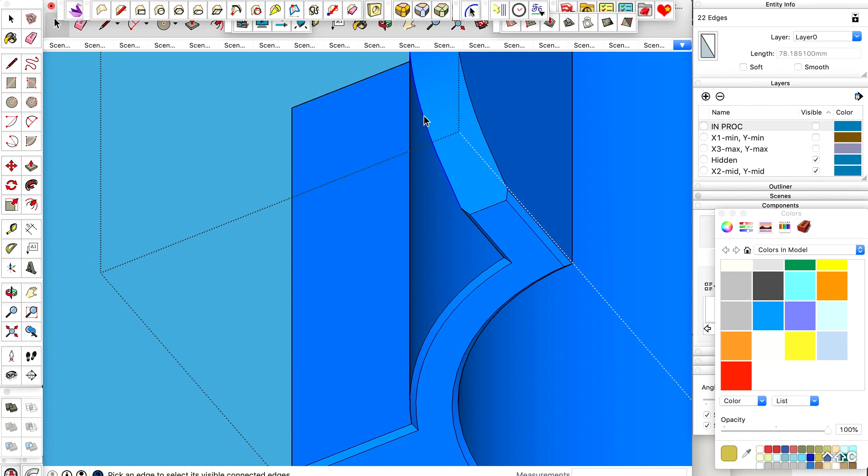Oh, there's one other thing we can do, and that is we can translate this curve to this part so that it will look like more of a match. So I'm going to go in here, tap on this line. Let's do that tool select curve, which for me is Control-Shift-C. Tap on this, Command-C to copy it, Command-Control-Shift-G to exit that group a couple of times, double click on this to open it, and then Command-Shift-V to paste in place. And let's drop that line on down to this one.

And it just becomes a question of how far we want to take it. I'm going to Command-Shift-C for selecting a curve and get rid of those extra lines there. And I think I'll start from right here. So I'm going to take a line from there to there, and take a line from there to there. And when I get rid of these, there will be nodes along this line that I can connect to this point to create triangles.

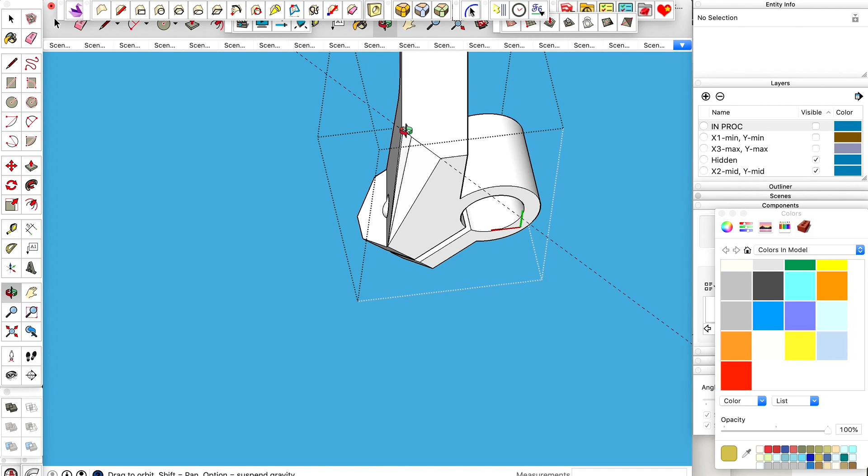And at that point, it's still printable. It's still got all this in contact with the print bed, but it's going to start angling up in a way that is going to make it have a nice compatibility with the finished part. So these very shallow direction changes on these faces, there's a way to automatically soften those. So I'm going to select everything, and I'm going to go to Smooth Soften Edges, tap on it, and you'll see these are now hidden lines. If I do Control-Shift-X, they show up again. Delete the guidelines, exit that group, and there we go.

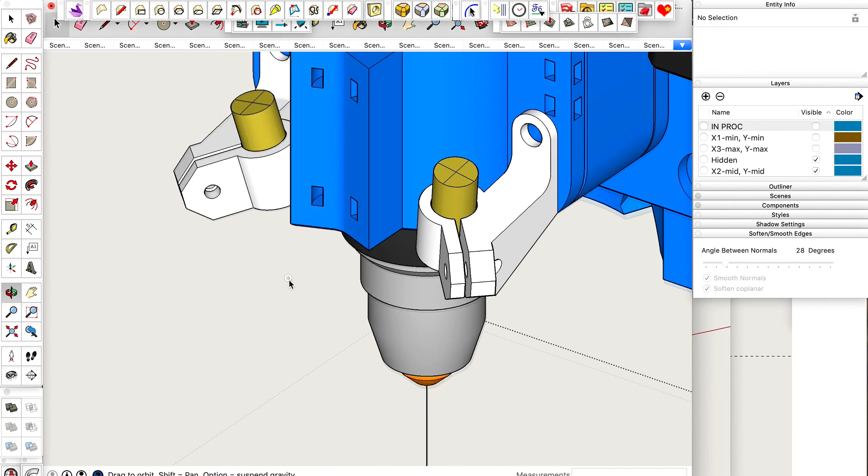Laser module holders, and now it's just a matter of inserting the screw and tightening down on it to hold it, but leaving it loose until I get the rotation, get them pointed in the right direction so they make crosshairs for shining on the metal down here. And I think all that's left is to go ahead and get that oriented for printing. Let's see.

I'm going to explode. This is laser holder right, but I want that to be laser holder left. So I'm going to, by the way, this thing's orientation I need to keep. So I'm going to rotate this. Let's make a copy. Move with Option, Make Unique. Making unique adds this #1 on the end. I'll change the name from right to left, get rid of the #1, hit enter, and now I will

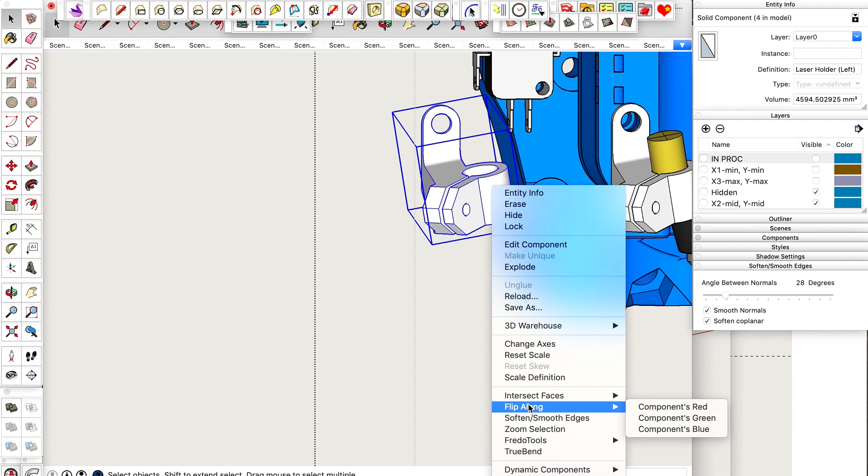looking for my axes there. Okay, so this one is backwards. So I'm going to right click, flip along red, then double click, right click everything and go flip along red. Now that should be mirrored in a way that has its axes normaled. I'm going to cut it so I can delete the copy of the right one that's mirrored but not really mirrored. Paste the left one in. So now I've got two parts that have been properly mirrored and named properly. So I'm going to save this.

I think I'm going to print this in black plastic. So at some point soon here, I'll go ahead and mark these with a paint color. But right now, I'm going to copy. I'm going to pick one of them, copy it, go Command New for a new file, and paste. And we'll see that it needs to be oriented for printing.

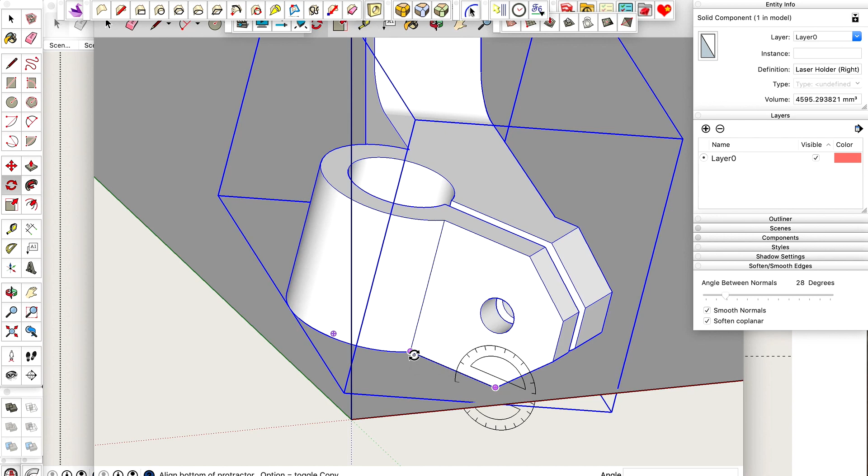So I'm going to go Q hotkey for rotate, tap on that point while I'm oriented on the face of that side, grab that point, and then tap on that corner. And at that point, I aligned everything for printing properly. So now if I cut and paste and tap on that corner, it lines it right up with that corner where it needs to be. Delete these. So this one is laser holder right. Command S for save. Let's put it in its own folder.

And this one is laser holder right, version 1.0. And I will grab a screenshot, and then I will export that as a stereolithography printable file, an STL file. Export. We'll create a folder for STL, laser holder right, boom.

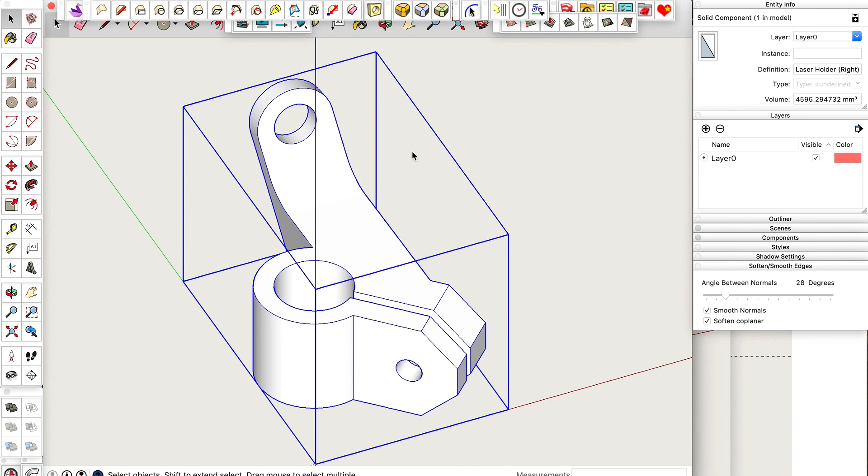And now let's get this one. Start a new sheet in Cura and open these up in Cura. And I think these will be okay with no supports. 35 minutes, 8 grams. And so next up, I'll print these and we'll let you see how they look on the actual unit itself.